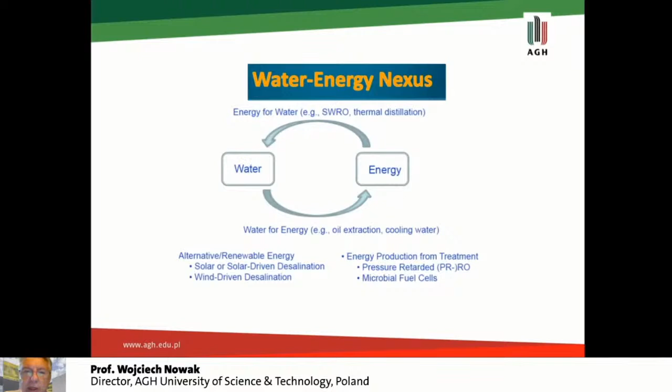In my center, I have more than 40 very well equipped laboratories. Of course, our area is mainly energy, conventional energy, but also renewable energy, industrial power engineering, electrical grids, and other. Of course, one of the main topics also is desalination technologies, mainly in the area of energy and water, and mainly to use alternative sources of energy for solar-driven desalination processes. One of these solar desalination processes is combination of photovoltaic technology with reverse osmosis technology.

And our idea and our concept, which we developed together with our partners in Saudi Arabia, is cogeneration, when we can use low-grade waste heat, let's say with a temperature of 60 to 85 degrees. This process is an adsorption cycle, and in addition, we can do also cooling. Here you can see our technology developed jointly by company NET from Poland, together with our partners from Saudi Arabia, King Abdulaziz City for Science and Technology, where we are using, as you can see here, solar to cool and also to desalinate water.

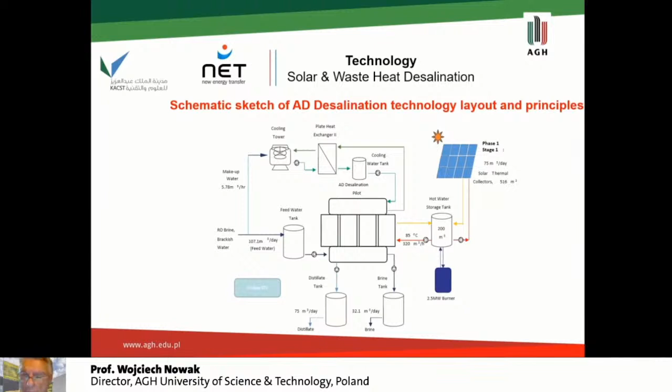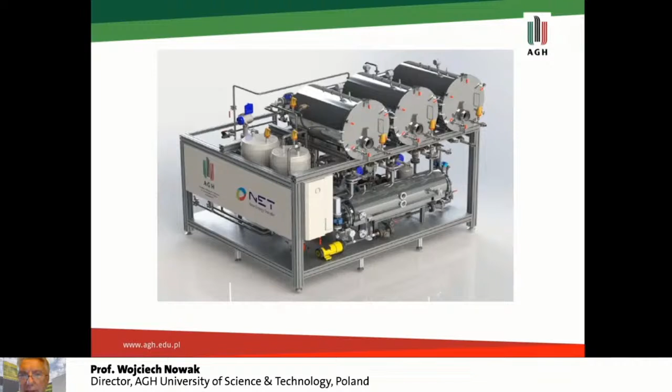And finally, you can see here our equipment, which is a demonstration plant located in Kraków, in my center. And some of you had a chance to visit us to see this demonstration plant for desalination using waste heat and also solar heat. More detail will be presented during this webinar by my colleague.

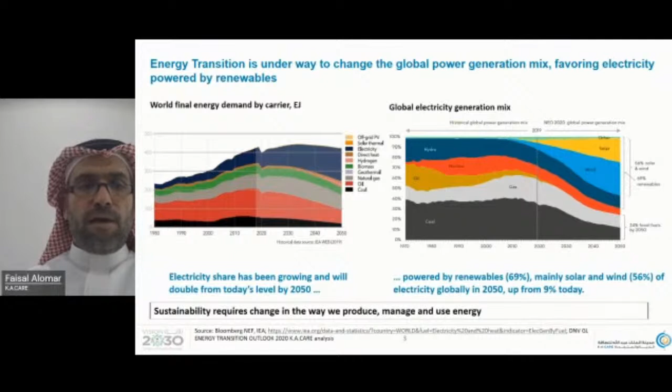There are 6 major trends driving change in the global energy sector. Start with the evolution of technologies and digital transformation. Many different technologies are in the development stage, which are expected to change our style of living. Seeking to reduce carbon emissions and climate change, there is increasing international interest in climate change as it is a real threat. The current pandemic has brought forward countries' and international organizations' alignment, pushing to reduce CO2 and greenhouse gas emissions.

Increasing the competitiveness of the renewable energy sector: the cost of solar and wind is significantly reducing, increasing the competitiveness compared to fossil fuel sources. There is also diversity of energy sources and increasing sector interdependency and electrification, which is a major trend, like the global spread in the use of electric vehicles and electrical mobility in general within the transportation sector, that affects the electricity sector.

Last but not least is the growing geopolitical role in energy security. And we see also renewables recently becoming part of geopolitical energy security. The surprise COVID-19 pandemic has also affected many trends, but on a positive note, the share of renewable energy is expected to outpace forecasts post-COVID.

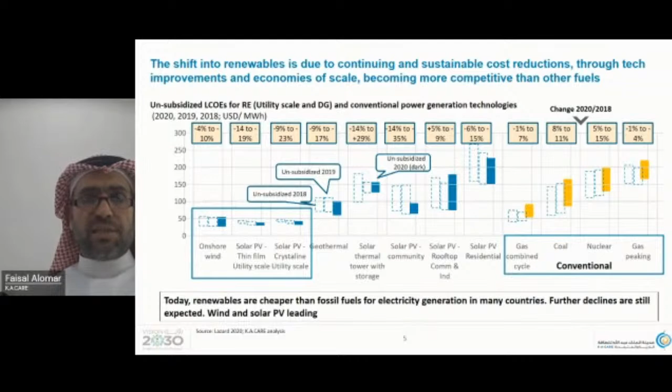Enabling technologies such as batteries are experiencing rapid reduction in cost, which might further enable renewable adoption. Storage batteries get cheaper over time via synergies with growing battery demand for electric vehicles. Batteries paired with PV in sunny regions like the Kingdom will be a viable solution to meet the base load demand after sunset. The battery storage capex is also declining, giving the economics a favorable perspective.

The Kingdom is not an exception. The energy sector in the Kingdom is witnessing an important and fundamental transformation, including the commitment to develop a strong renewable energy sector. The Kingdom has clearly started a renewable journey as part of the Saudi Vision, targeting 58 gigawatts by 2030, and has achieved a very promising levelized cost of electricity, where the Faisaliya project has a record levelized cost of electricity of 1.04 US dollar cents.

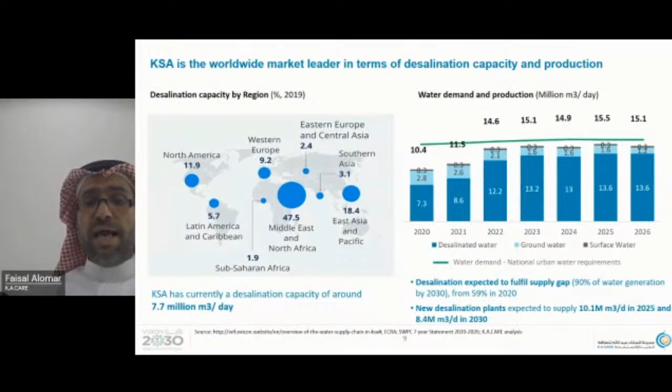Then we move forward to the potential renewable desalination opportunities. KSA is the worldwide market leader in terms of desalination capacity and production. The Middle East and North Africa contributed 47.5% of this market in 2019. KSA currently has a desalination capacity of 7.7 million cubic meters per day. The demand is growing, and desalination to fill the supply gap is also expected to increase. New desalination plants are expected to supply 10 million cubic meters per day in 2025 and 8.4 in 2030. RO technology comprises half of the total desalination capacity, mostly for commercial or industrial use in small units.

The water scarcity associated with high fuel consumption in desalination creates another important application for renewables. Renewables and desalination can be coupled in many different ways through electrical and thermal coupling. The energy consumption is one of the deciding factors for the best coupling scenario. PV-RO is currently the most widely deployed technology for renewable energy desalination. The adoption of renewables for desalination in KSA should be further deep dived in order to find the best solution for the KSA ecosystem. A new pioneering technology is also underway in projects like the NEOM Solar Dome.

So we move forward to exploring the most prominent technological combinations between renewables and desalination. PV desalination systems, which usually depend on reverse osmosis units, can also be buffered by a grid connection or battery storage. The main advantage of the PV-RO system is its water cost advantage over fossil fuel, with components commercially available. The viability depends on plant capacity, distance to grid, and feed concentration. There are many pilot and commercial plants, and it's considered a mature technology. We would also highlight that the new desalination project announcements of Yanbu 4 and Jubail 3A are evidence that PV-RO is gaining momentum as a viable economical option. The disadvantage is that for a standalone solution with no power grid connection, energy storage is required for energy fluctuation.

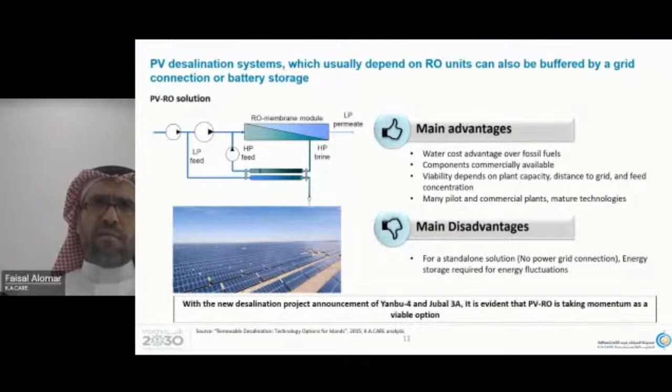Also, the noticeable decrease in the prices of solar PV modules, and the continued decrease in the levelized cost of water of the RO market, is a sign that both the photovoltaic and reverse osmosis markets are showing promising and attractive economics. Just to give a high-level indication: a 56% decrease in the levelized cost of energy would contribute to a reduction of the levelized cost of water by 19%. This is just an indicative figure to show how significant the impact of energy is on water cost.

Another source of a viable combination is wind energy, which is mature technology proven to be economically feasible when combined with desalination system. The advantage is the high pressure source allows for mechanical coupling and robust flywheel energy storage, seen as one of the most promising combinations, mature and proven.

Decreasing wind turbine cost and RO component cost would also promote the adoption of renewable desalination. The main disadvantage is it's fairly restricted to areas with a high wind speed and high fuel prices. The power variation and interruptions compromise component lifetime. Wind energy has been directly converted to mechanical energy for centuries, and it is possible to couple it mechanically to a desalination system like RO, but this is something that would further require some research and development.

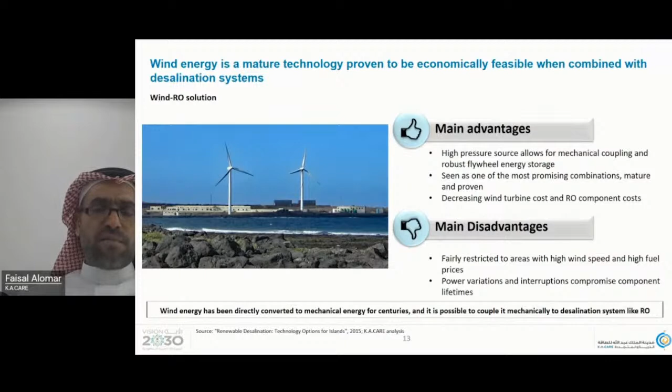So here we give a summary: given the level of intermittency and low maturity in some renewable energy solutions and the planned investment in the new desalination plants, several techno-economic studies should be performed to quantify the benefit against fossil fuel desalination plants. And we summarize the challenges, which is intermittency of the RE technology, and integrating renewable energy sources directly with the desalination unit runs the risk of providing intermittent and fluctuating power to the desalination unit.

Some technologies have not yet reached a high technology maturity or readiness level or cost effectiveness. Lack of information and studies regarding renewable desalination opportunities and the market in the kingdom, given the rapid changes that are happening in the renewable energy and storage technology. There is a potential RE desalination solution where we need to manage the trade-off on cost and benefit of the usage of energy storage, location for the renewable energy resources, solar and wind, or even a combination of hybrid solution, and the desalination technology that would need to maximize electrical output and optimize the levelized cost of water.

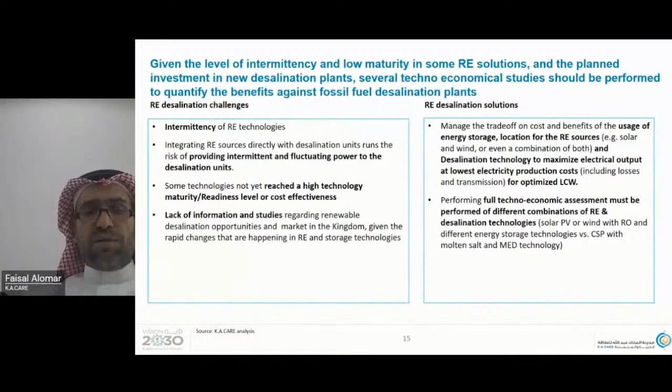Second, enabling solution would require a full techno-economic assessment to be performed for different combinations of renewable energy and desalination technologies: solar PV, wind with RO, and different energy storage technologies versus the CSP with molten salt and MED technologies. K.A.CARE is currently working to address these opportunities and challenges, and we here would like to share with you the recent effort in renewable desalination.

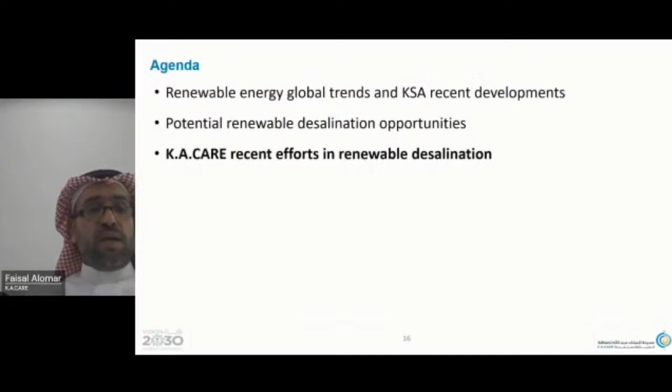K.A.CARE has developed plans to evaluate the opportunities and challenges in RE desalination. One, the initiative, economic estimation of the cost of desalinated water using fossil fuel, renewable energy, and nuclear energy. It's a comparative economic analysis of the cost of desalinated water in Saudi Arabia using various energy sources and technologies. It's a collaborative project between K.A.CARE and King Saud University.

Its analysis models were used to evaluate the cost of water desalinated by MED, MSF, and RO using renewable energy sources. 14 coupling scenarios on renewable energy desalination have been considered, and 6 scenarios with the least levelized cost of water, with PV-RO being the cheapest.

K.A.CARE also, with another initiative, aimed to conduct a techno-economic feasibility study for the case of PV-RO, considering multiple scenarios specifically for the photovoltaic reverse osmosis technology coupling, considering different zones in the kingdom, and also having a simulation to visualize and analyze the energy flows for each scenario.

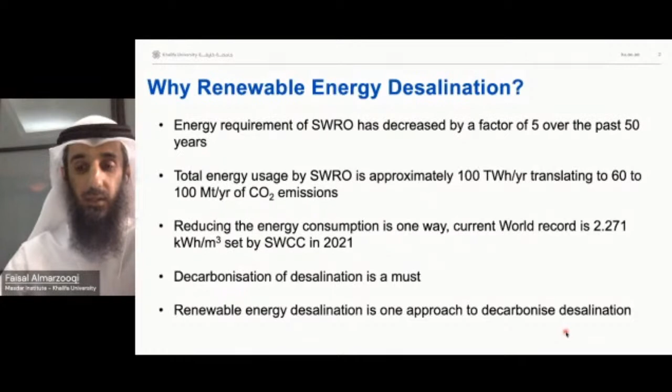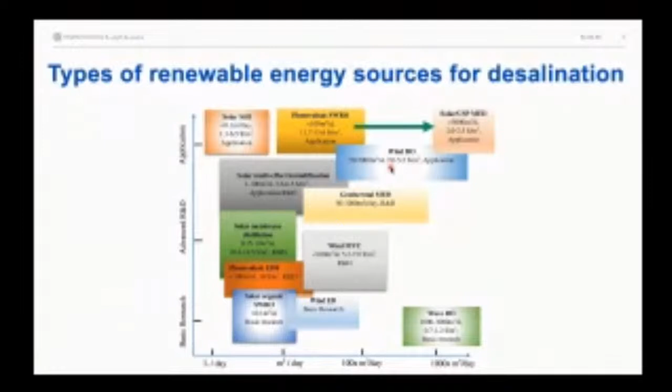Now, moving forward, there are many different types of energy sources for desalination. This figure shows the current renewable energy sources that have been utilized for desalination. It is dominated by far by solar; you could see solar almost everywhere. Other types of renewable energy sources are wave, wind, geothermal, and others include biomass and hydrothermal, emerging recently, but nevertheless solar is dominant by far.

On the y-axis, we see the maturity of the technology, and clearly solar CSP MED has been the most mature; also solar stills and PV reverse osmosis are mature technologies. On the x-axis, we see the capacity, and again, solar CSP MED is the highest. One update: this figure is not up to date. PVRO, or PV seawater reverse osmosis, has moved to the right, and today we have PVRO systems at approximately 1,000 meter cubed per day capacity.

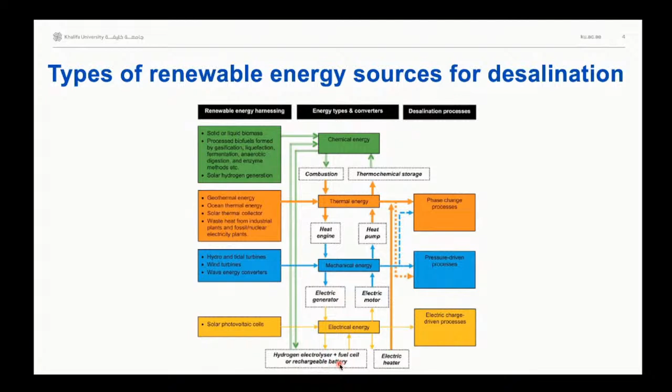And then on the right, the third element is the actual desalination technology. So you could see here pressure-driven reverse osmosis, electrical charge-driven processes such as electrodialysis. And one aspect which is important in this diagram is energy storage. When we talk about renewable energy, energy storage is extremely important because of the nature of this energy source. And here we see fuel cells and rechargeable batteries as two examples of energy storage.

When we talk about solar water treatment or solar water desalination in general, there are two different concepts: direct on the right and indirect on the left. So let's start with the simplest, indirect. Indirect means you take a renewable energy technology such as solar cells, wind turbines, and so on, take energy from them, and then connect it to a desalination technology that will desalinate the seawater for you.

This is different from a direct concept in which a single device directly utilizes the renewable energy to desalinate seawater. And you will see an example of this towards the end of the slides today.

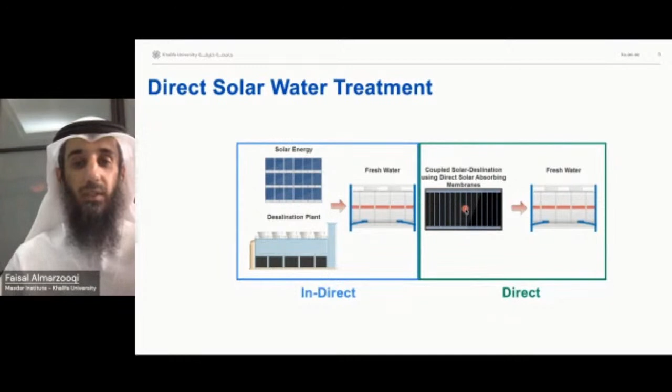So what is the current status of solar-powered desalination? We see the most efforts in reverse osmosis plants because they are the state of the art. And this table shows you the current demonstrations online and also planned projects. It dates back to 2012 in systems in the US in terms of history, but in terms of capacity, which is always attractive, we see that again the Kingdom of Saudi Arabia is leading, where they have the Al Khafji project, where they plan to have the highest capacity across the globe as a solar-powered reverse osmosis plant. This is not yet commissioned as far as I know, but it is in the plan.

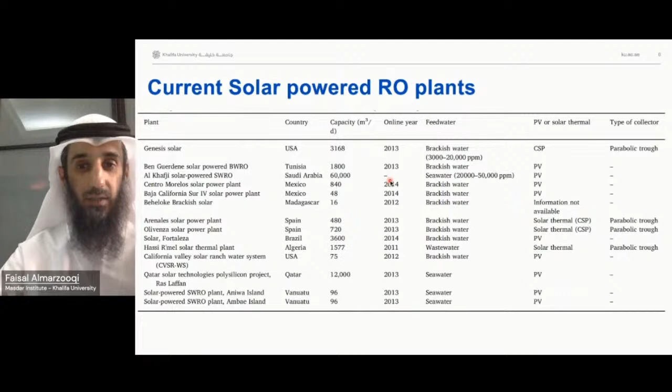Now, when we talk about commercialization, large-scale applications, cost is an important factor. We always struggle with cost, especially at large scale, because of the scarcity of data and the nature of research. Nevertheless, there are some figures that give you an indication. If you start with the typical seawater reverse osmosis levelized cost of water, it's around $1.25 per meter cubed. If we look into solar-powered MD, which is membrane distillation, one of the technologies that directly utilize solar energy to desalinate water, it is approximately 5 times that of seawater reverse osmosis or more. It goes to 85. Just a note here, the seawater figure is without the solar power systems.

But if we look at hybrid PV, diesel, RO systems, the cost comes close to the state of the art in desalination, 1.6 approximately, which is quite a good achievement. And that shows you the importance of hybrid systems in solar desalination.

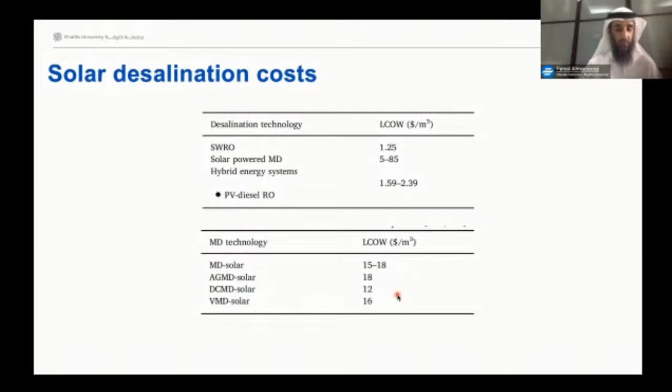But as a researcher in membrane distillation specifically, I can tell you that these numbers mostly stem from the low recoveries in membrane distillation, which is a fundamental problem, especially when we talk about solar-powered desalination. Okay, so that is basically cost.

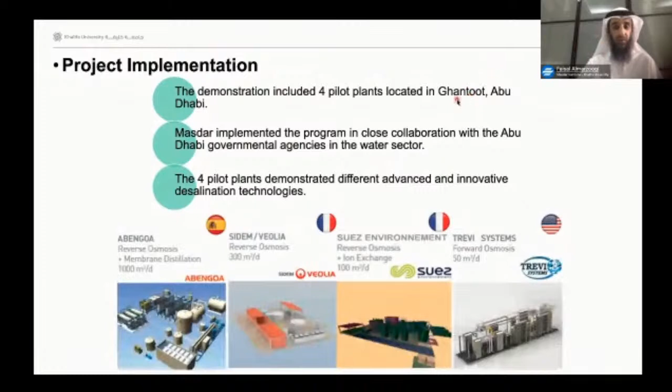In the UAE, we have an experience with solar desalination, and that is through Masdar company. This project was announced back around 2012, 2013, and it was led by Masdar company and different other entities in Abu Dhabi. The idea was to implement solar desalination in Abu Dhabi in an area called Ghantoot that sits between Dubai and Abu Dhabi. And four pilot plants were announced by four various companies in the sector.

And later on, a pilot plant was announced also for this project with these specifications. I'm not going to go into the details. Unfortunately, the project was stopped after approximately 3 to 5 years. Back then, I was actually a student, so I didn't have a lot of interactions with the teams. But that project is actually discontinued.

In terms of research, what we do in the lab here in Khalifa University Masdar Institute, we do various research in solar water treatment in general. Here I will list for you some examples. We develop photothermal brine desalination technologies, and they are funded by various entities, which I show here, in which we develop basically devices to desalinate brine through a source of solar energy. And another project within the same context is the photothermal heavy metal removal from wastewater, which is also a solar-driven technology for water treatment in the general context.

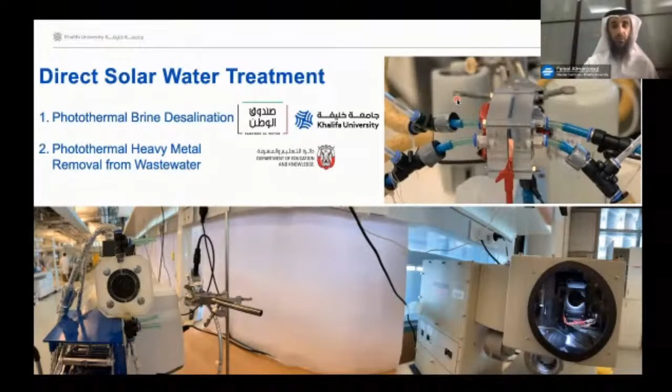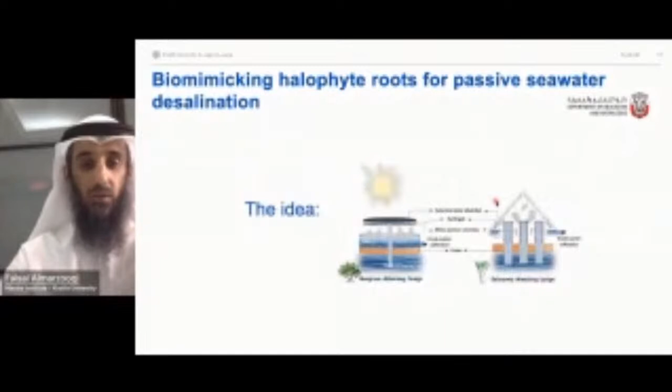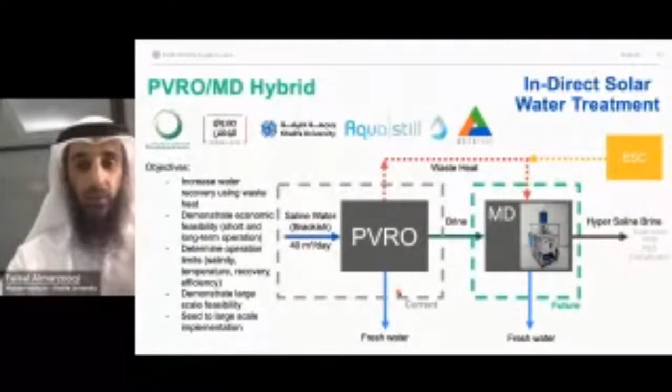Other approaches to solar desalination are through biomimicking nature. And here we developed basically halophytes that are artificial. We take water from a source and then evaporate it based on materials, and then hopefully desalinate it in some other process. Lastly, on a large-scale context, we have a project where we look into PVRO and coupling it with MD, or sourcing it through solar power. In terms of the future, I see that the future will be mostly in hybrid systems, hybrid renewable energy sources, and hybrid desalination technologies, and also a combination of the two.

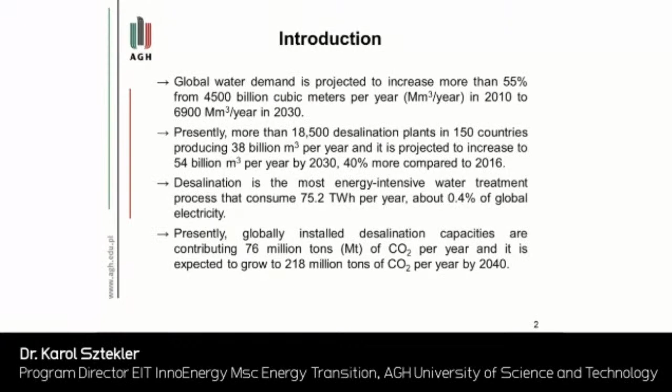Desalination is the most energy-intensive water treatment process that consumes about 75 terawatt-hours per year. It is about 0.4% of global electricity. Presently, global installed desalination capacities are contributing about 76 million tons of carbon dioxide per year, and it is expected to grow to 218 million tons of carbon dioxide per year by 2040. According to the reports of the International Institute of Refrigeration in Paris, the refrigeration sector consumes about 20% of the world electricity production, and air conditioning equipment in the global electricity demand is about 10% in 2016. Most of these air conditioners are compressor systems which use electricity.

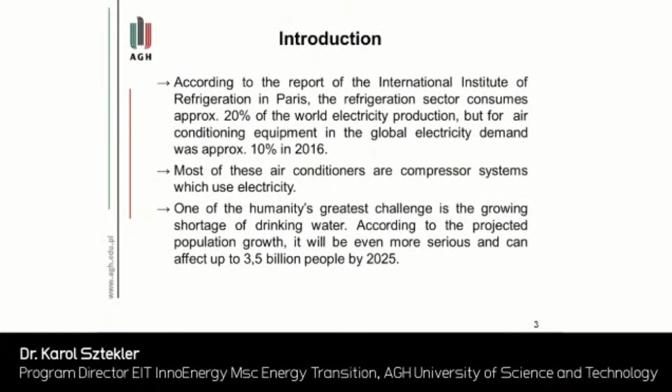Mostly, electricity is produced from fossil fuels that have influenced the total carbon dioxide emission to the atmosphere. One of humanity's greatest challenges is the growing shortage of drinking water. According to the projected population growth, it will be even more serious and can affect up to 3.5 billion people by 2025.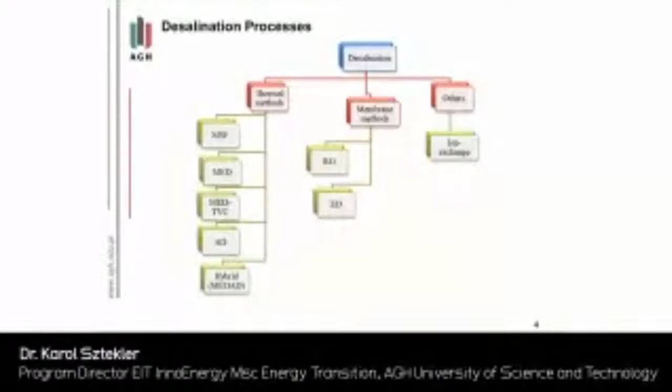The commercial desalination technology can be divided into two main categories. First is thermal methods, such as multi-stage flash distillation, multi-effect distillation, and adsorption desalination, and membrane methods such as reverse osmosis. In addition, there are different emerging technologies which are still under research and development, including forward osmosis, membrane distillation and heat pumps.

The tables show the important parameters of the most common desalination technologies. The adsorption chiller with desalination function is marked in red. What is characteristic of this kind of technology is, of course, the operating temperature from 55 to 85 degrees. Thermal energy is about 39 kilowatt thermal per cubic meter, and electrical energy is below 1.5 kilowatt per cubic meter. And the CO2 emission ranges from 1 to 4 kilograms per cubic meter.

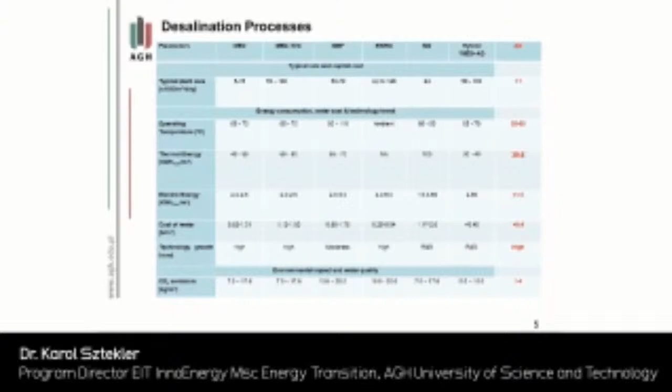This kind of technology, compared with different types, has a very low influence on the atmosphere, because the emission of carbon dioxide is very low, and total electricity consumption is very low. The adsorption chiller with desalination function is becoming an ecological alternative to compressor cooling systems and energy-consuming water desalination units. They make it possible to operate adsorption and desorption cycles using only low-temperature heat, which can be waste heat or derived from solar energy.

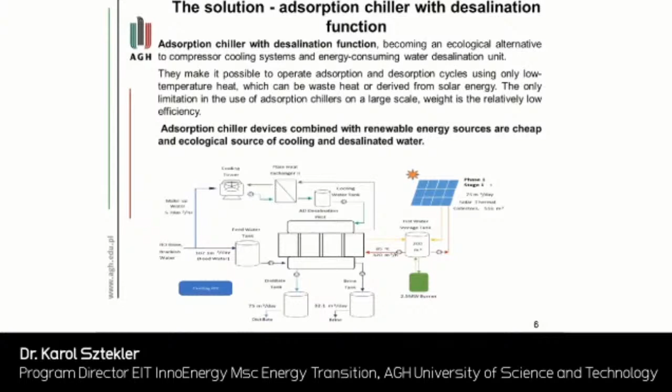The only limitation of this kind of technology is large scale, weight, and relatively low efficiency. Adsorption chiller devices combined with renewable energy sources are a cheap and ecological source of cooling and desalinated water. The adsorption chiller with desalination function has three main components: the evaporator, bed, and the condenser.

In the evaporator, the pressure is low, below 1 kilopascal. The water is evaporated. The steam flows directly to the adsorption bed. During the adsorption process, the steam is adsorbed on silica gel or different adsorbents. During the desorption process, we must deliver hot water to the bed, increasing the temperature and the pressure inside the bed, and we release the adsorbed water from the bed.

The water from the bed flows directly to the condenser, where the water changes from steam to liquid, and the water in liquid form flows out from the condenser. The world's largest adsorption desalination plant uses adsorption chillers manufactured in Poland. The cooling capacity is about 1 megawatt and production is about 100 tons per day. This installation is installed in the solar village at KACST.

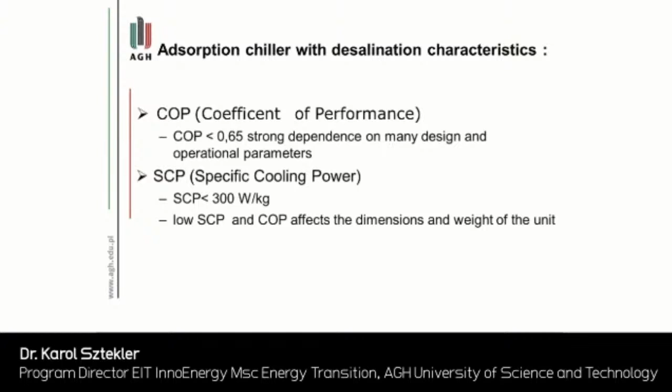Adsorption chillers with desalination function have some characteristics, such as the coefficient of performance. For this kind of technology it is low, below 0.65, and strongly depends on many design and operation parameters. Specific cooling power is below 300 watts per kilogram, and the low SCP and COP affect the dimensions and the weight of the installations.

AGH, in cooperation with KACST and the New Energy Transfer company, conducted research on methods of increasing the efficiency of adsorption chillers, such as increasing heat transfer in the heat exchangers, finding new materials with higher thermal conductivity, increasing the number of adsorption beds, application of artificial intelligence, using steam for chiller regeneration, and application of internal heat regeneration.

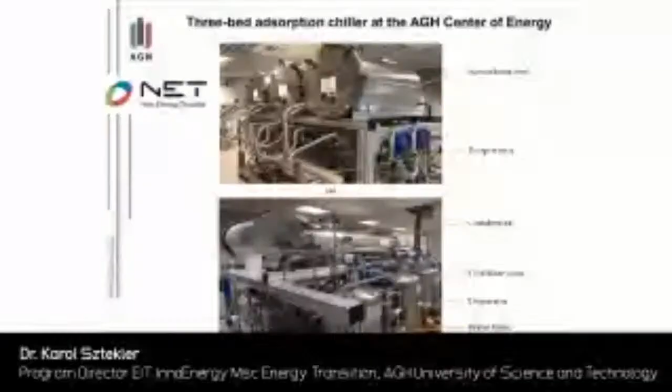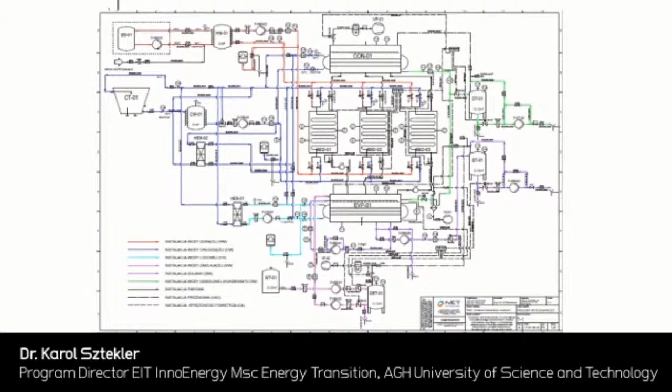At AGH is installed the adsorption chiller with desalination function designed by New Energy Transfer. This figure shows the main components of our device: adsorbent bed, evaporator, condenser, distillate tank, and the aerator tank. The main scheme is shown in the figure. This adsorption chiller with desalination function has 3 beds, evaporator, and condenser, and can operate in the mode of desalination, chilled water production, or both desalination and chilled water production.

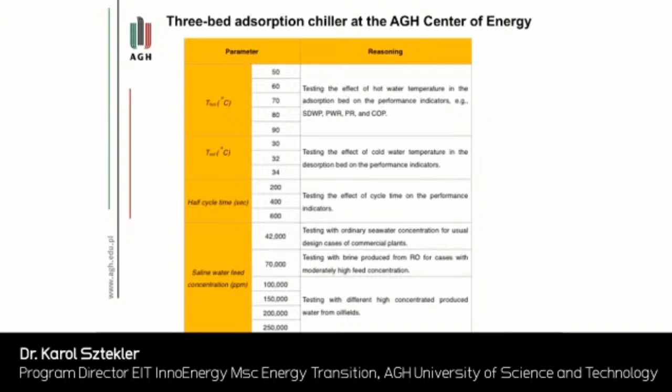On the adsorption chiller with desalination function, researchers from AGH can test the influence of the hot water temperature on the specific daily water production, COP, and specific cooling power, test how the cold water temperature influences the desorption of the bed, how different adsorption-desorption times influence the COP and overall effectiveness of the system, and analyze how different concentrations of saline water influence the total efficiency of the system.

One of the research studies conducted on the adsorption chiller with desalination function is the optimization of the adsorption chiller with desalination function, where we analyzed the influence of different heating water temperatures in the range of 55 to 85 degrees on the COP, SCP, and specific daily water production.

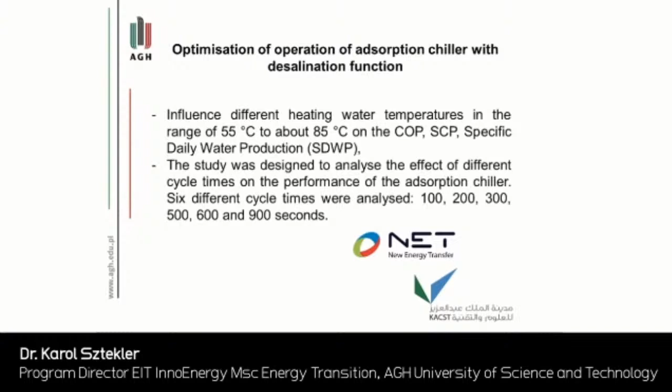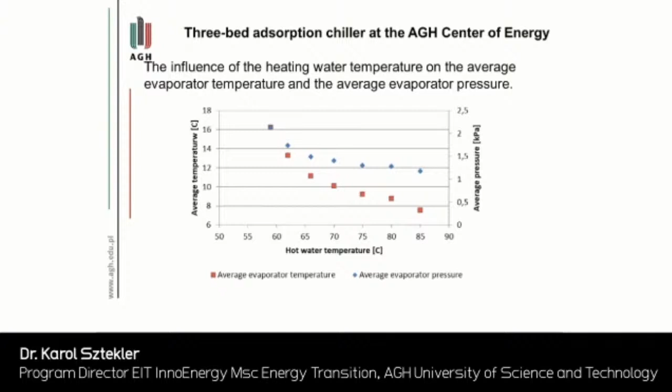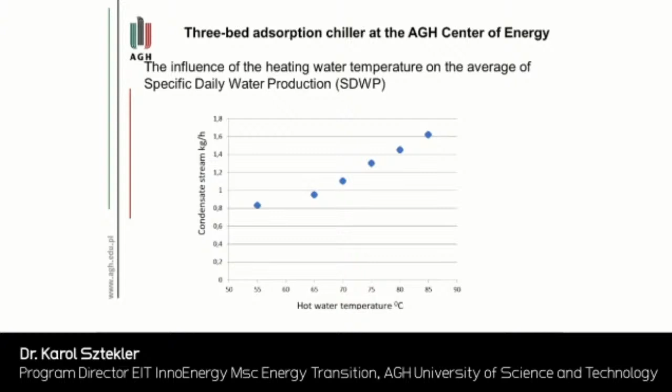the stable working of the installation, because at these higher desorption times, the desorption process shows increasing temperature of the evaporator and the condenser, and this difference between condenser and evaporator has a significant influence on the total efficiency of distillate production during the desalination process.

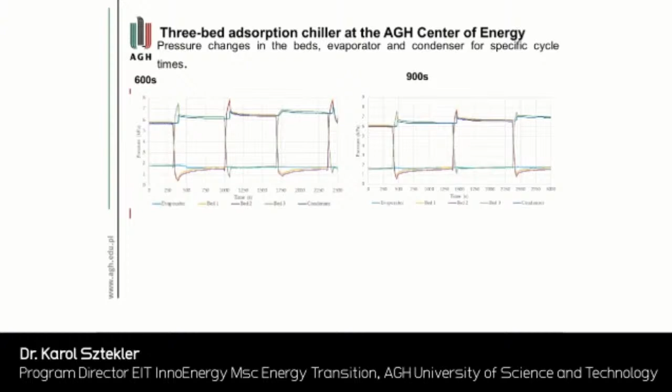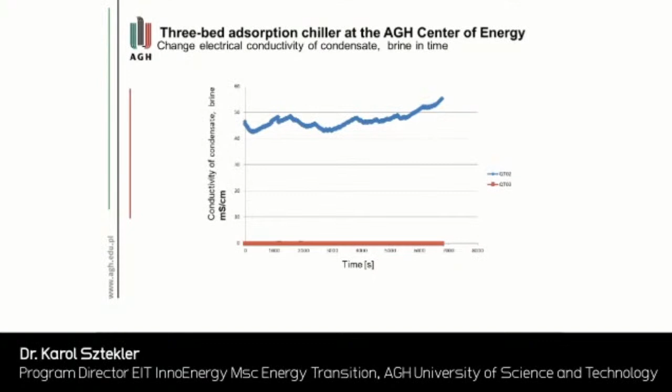This figure shows the change in electrical conductivity of the condensate from the beginning of the test. At the start of the test, the brine has a conductivity of about 46 millisiemens per centimeter, and at the end of the test, we have a conductivity of about 56 millisiemens per centimeter. Distillate produced during the whole process has the same level, 0.07 microsiemens per centimeter.

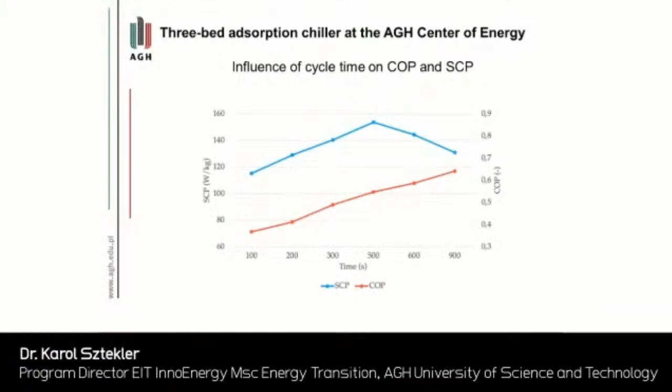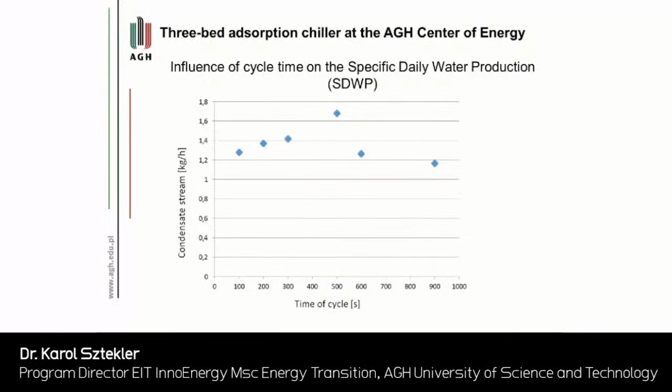The AGH, in cooperation with the Institute of Fluid-Flow Machinery and the CACS, prepared new materials for adsorption chiller analysis to determine the influence of additives to silica gel, depending on their amount, on the process of adsorption of water vapor. The purpose of this research is to improve the efficiency of the adsorption process within the bed by the use of metallic and non-metallic additives, characterized by higher thermal diffusivity than basic adsorption bed materials.

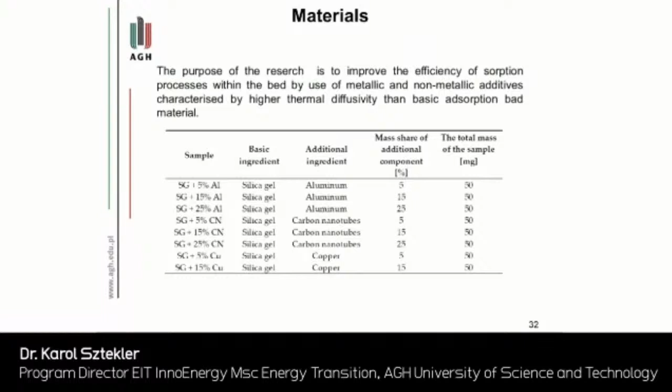This table shows the different types of additives that are added to the silica gel, at levels from 5% to 25%. In this research, we use aluminum, carbon nanotubes, and copper.

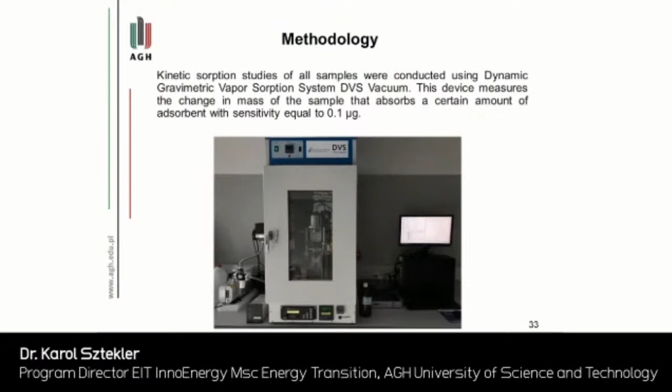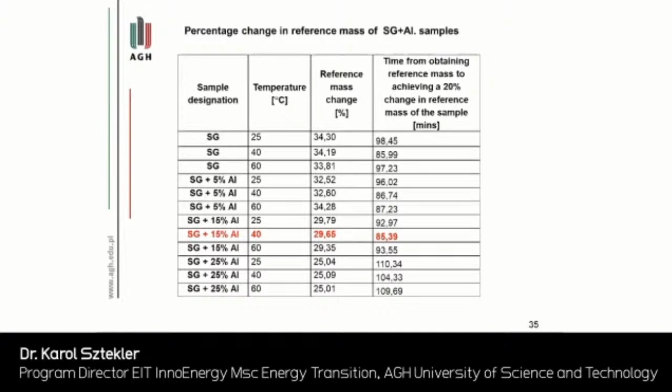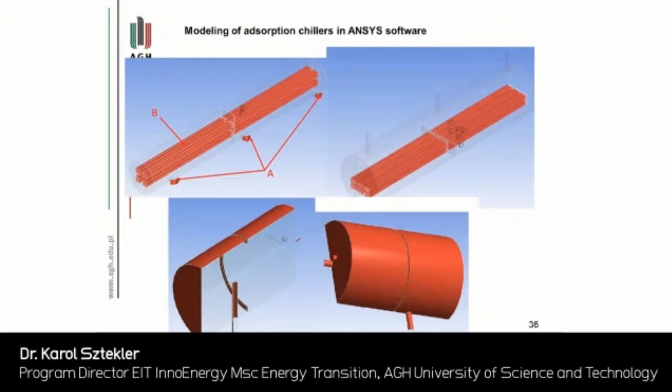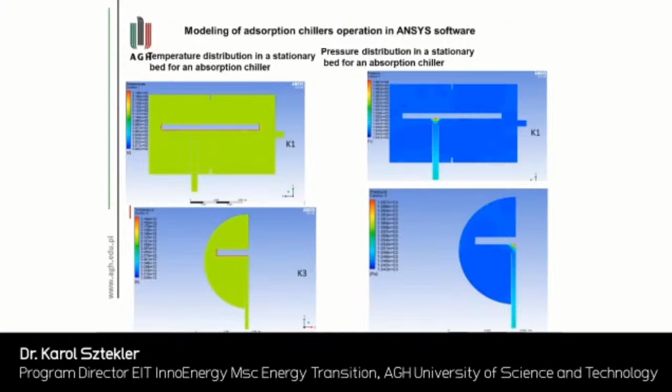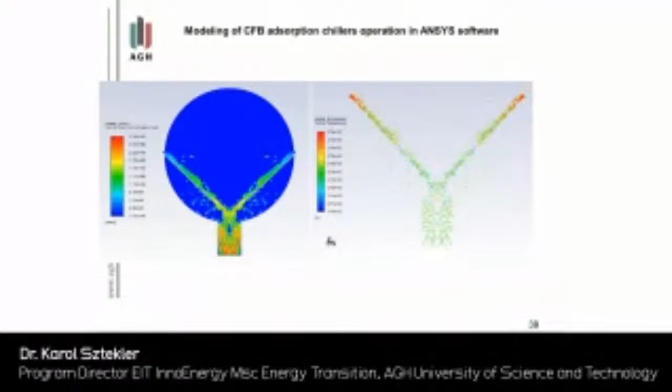This figure shows the distribution of the temperature and the pressure in the stationary bed. And this figure shows the flow of the vapor inside the adsorbent beds during the process of adsorption. And the research from AGH and New Energy Transfer was conducted to find a new product, new adsorption chillers operating in the moving bed. This kind of adsorption has the highest efficiency and low mass if you compare with the stationary bed.

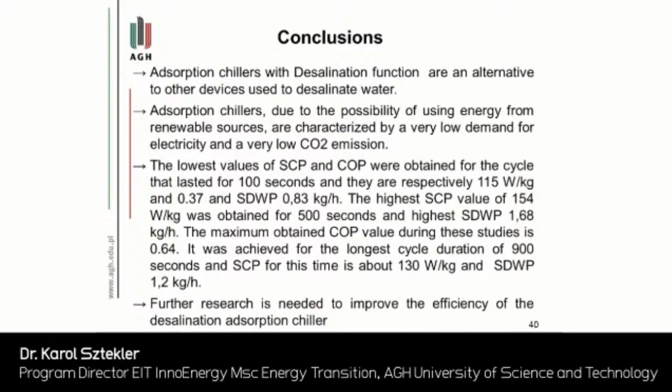Result with the actual data that we get from the local market here, or local conditions, I mean, and looking forward to apply this in the field.

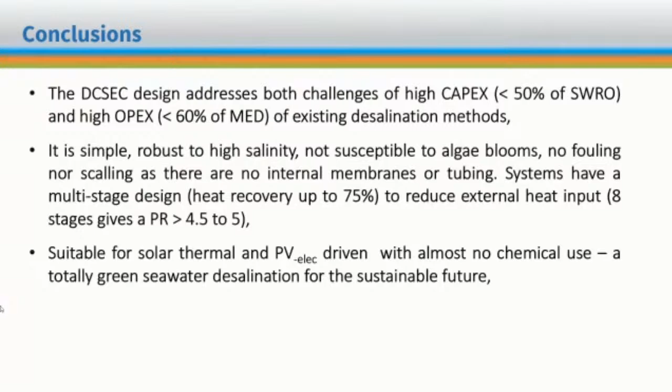Thank you, Dr. Raed. Shukran. Thank you, Dr. Raed, for such a presentation and the data. I was really interested in seeing the effect of the bubble surface area on the efficiency. As I understand, there's not much of questions from the audience, but first, I would like to say two comments, then I will ask our speakers if they have any final concluding remarks.

Regarding the Al-Khafji plant, which was mentioned in Dr. Faisal's presentation, actually Khafji has been working for the last 3 years. I got this information from my colleagues at the Saline Water Conversion Corporation, SWCC. The Khafji plant has been working for 3 years. Its design capacity is 60,000 cubic meters per day. And actually, it is connected to solar. As you imagine, the capacity factor of solar is 5 or 20%.

It's a factor of 5, so 20%. So it takes 20% of energy from the PV plant, and at night or when the sun is down, it takes the energy from the grid. And I imagine there is a tremendous amount of information available in the operation and maintenance of such a plant.